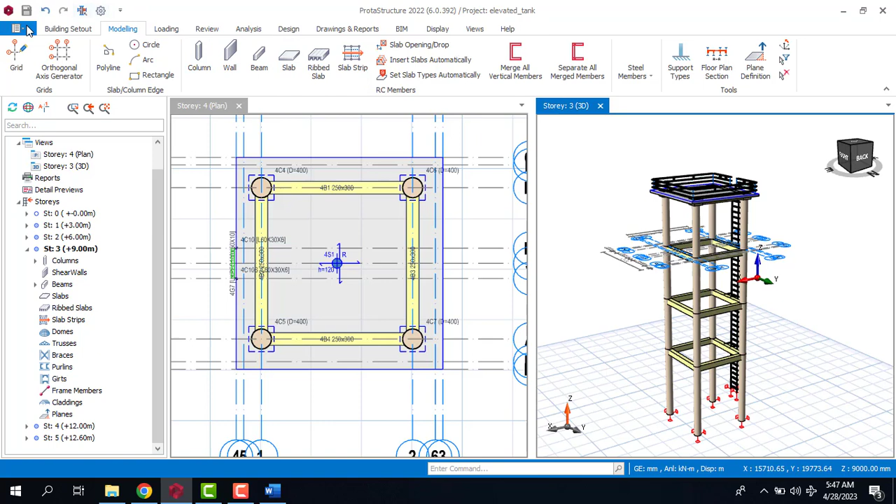Firstly I'll come to new project and I'm going to call this tank.

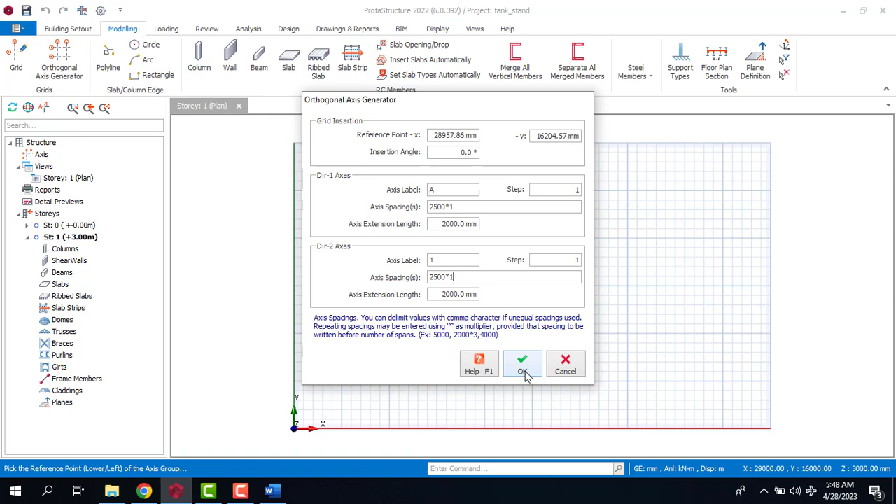Then I'll come to my orthogonal axis generator and I'll make this one, make this 2.5, make this 2.5 as well, and to be times 1. Alright.

So I'll pick on my column. Let's say I pick a 300, let me go 350, sorry, circular column.

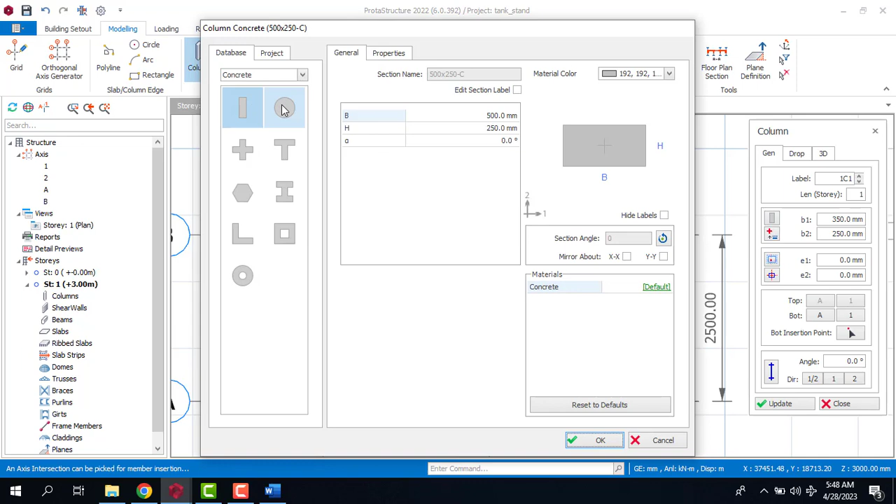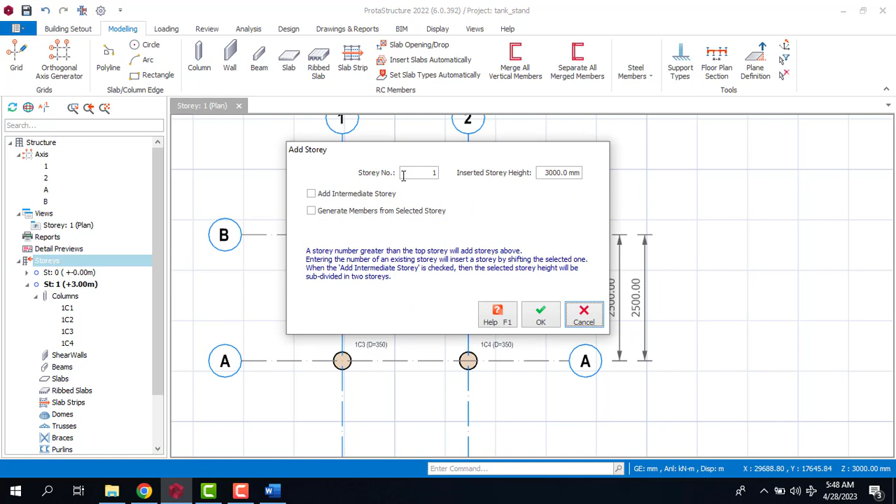Okay, nice. But then I'm going to insert, let's say I insert 5 stories, and I'll come to my story here and I'll click on edit story. This one I'm going to make it 800.

Okay, so I'll click on 3D plan model. Then I will click on story 1.

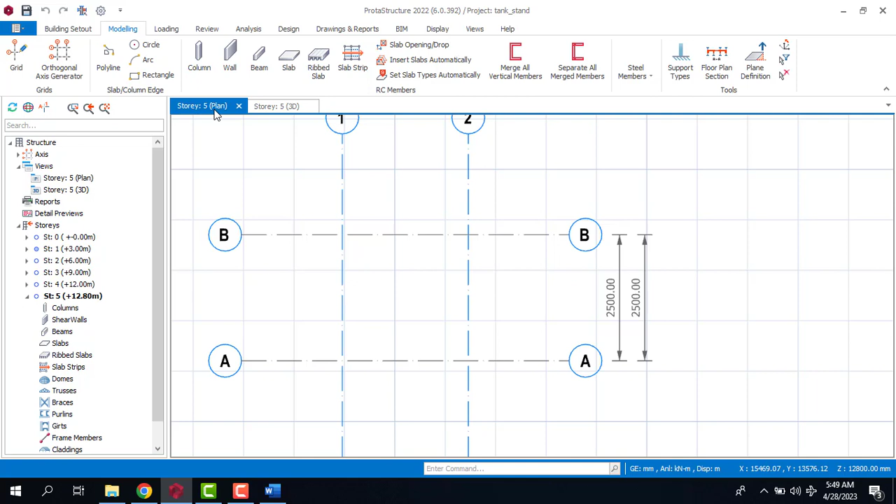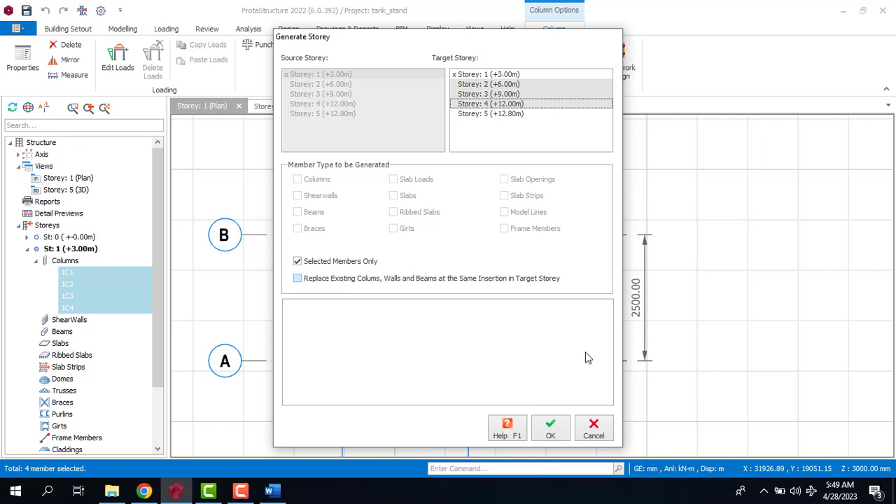Okay, then I'm going to generate these whole columns to story 4. Okay, that has been generated.

I'll come to my view here and I'll click on tile vertical. Okay, so you can see what we have here. Alright, so...

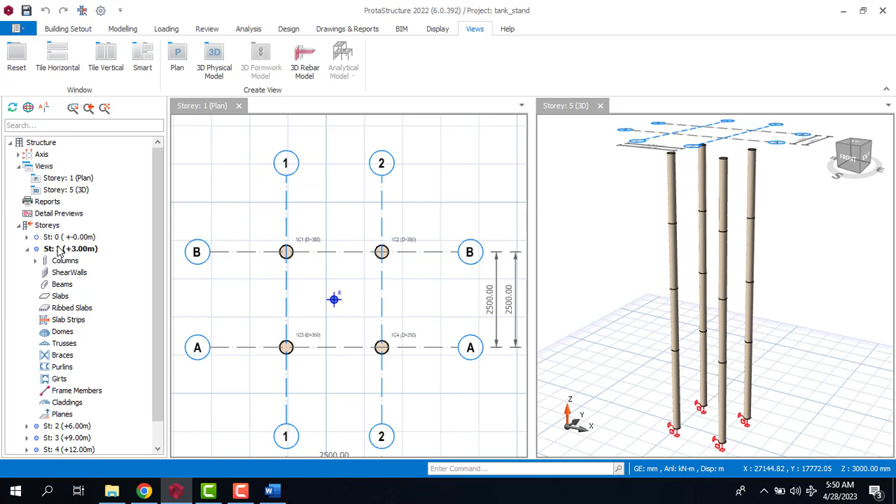Let's insert our beams. Let me pick a 300, 400 size of beam.

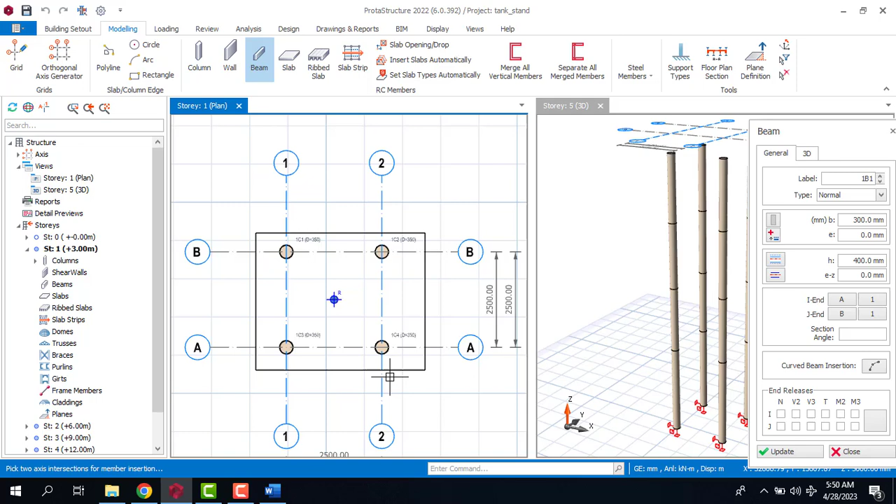Let me generate these beams to other stories.

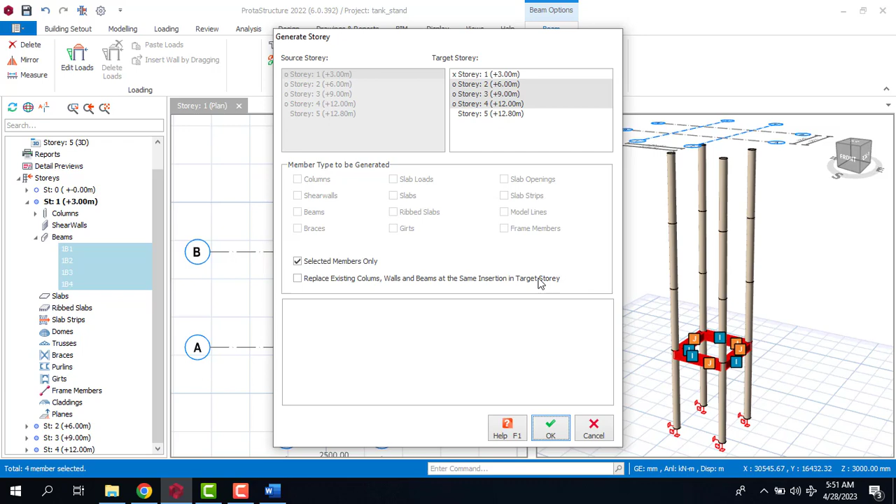Nice. And then on my story 4, I'm on story 4 right now. Come to the property, I will insert a drop for these columns.

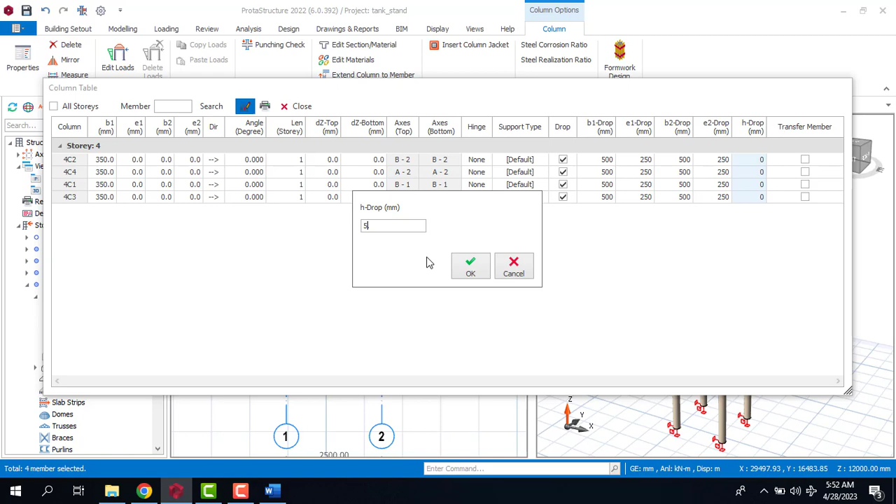Make it 500. To centralize it, 250. Make here also 500. To centralize, I'll make it 250. The height of this drop, I'll also make it 500, and I'll close.

Now you can see what we have. Alright, so at this level now we are going to have this slab to actually cantilever out. So I'll make it like 600. So I'll offset 600.

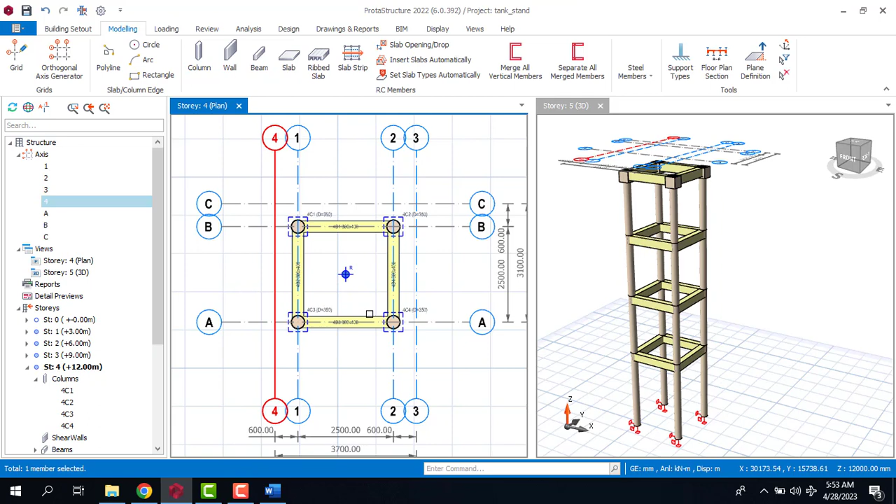I'll also offset this. Press F2, 600. Similarly for this, here will be minus 600 because I'm going horizontal left. If I'm going down vertically, alright...

I can just use my polyline to trace around this. Then I can insert a slab. Let's say this slab is 200.

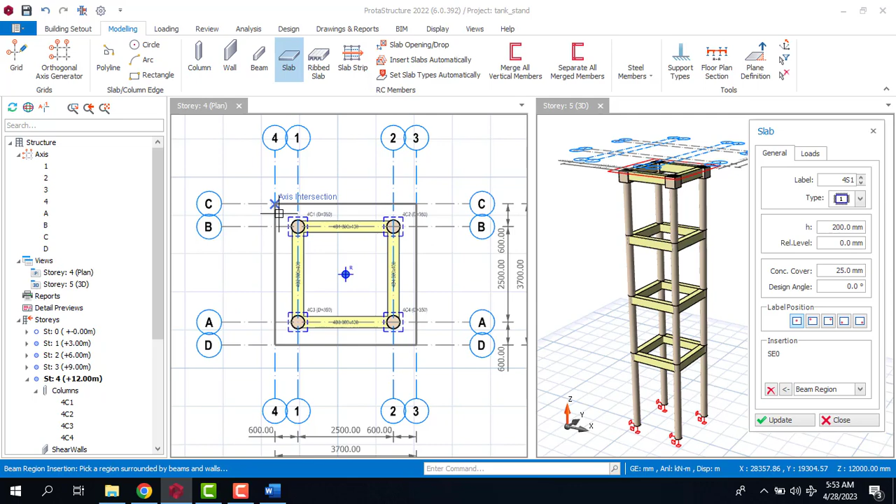Oh yeah, nice. So you can see what we have. Don't forget, I've not loaded this. We are definitely going to do that later as we proceed.

Alright, so we now have our model. I'll come to my columns. Alright, let me centralize this.

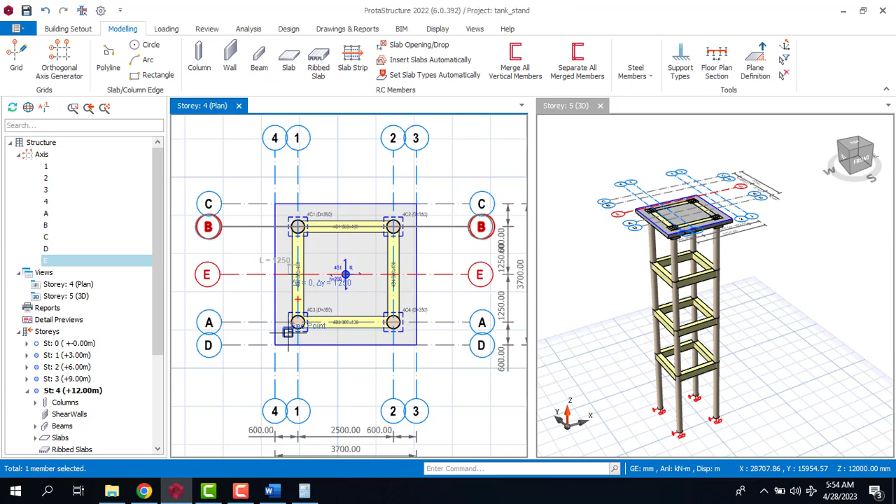2,500 divided by 2, that would be 1,250. So F2 1250. Then here now I'll set F2, make this 400.

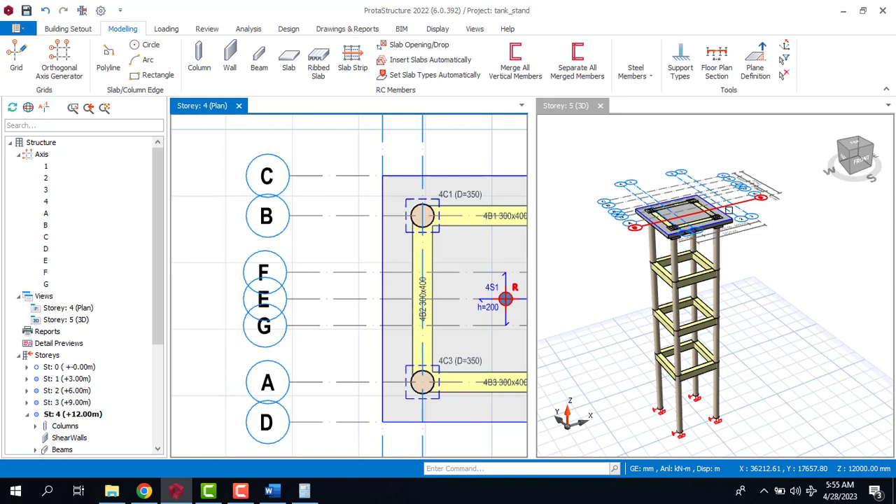I actually want to insert the ladder. Okay, so I want to have a ladder at the center here, and this will be more like the opening. We are going to have an opening here where you can actually just easily move to the top of this particular tank for probably cleaning or any maintenance.

Okay, so let's come back to the story 5. Alright, here now I'll have to insert my rails. Okay...

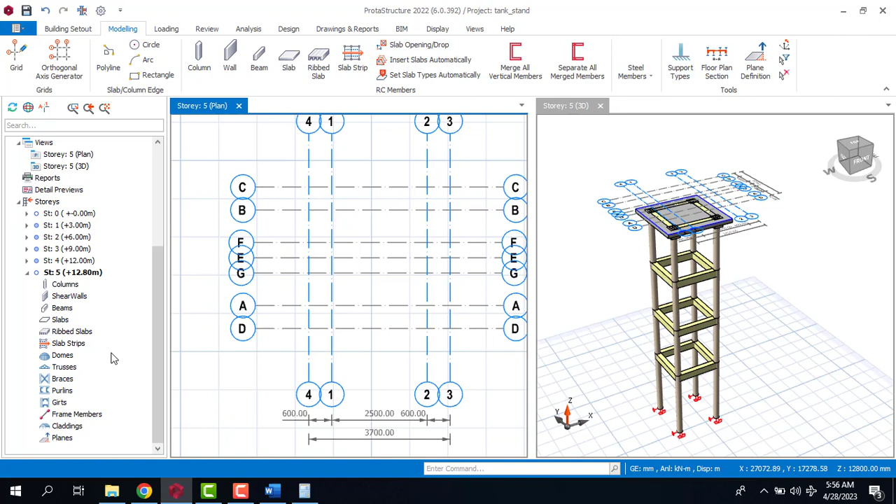Let's come to this point first. Let me insert the ladder first. I'll pick this cross section.

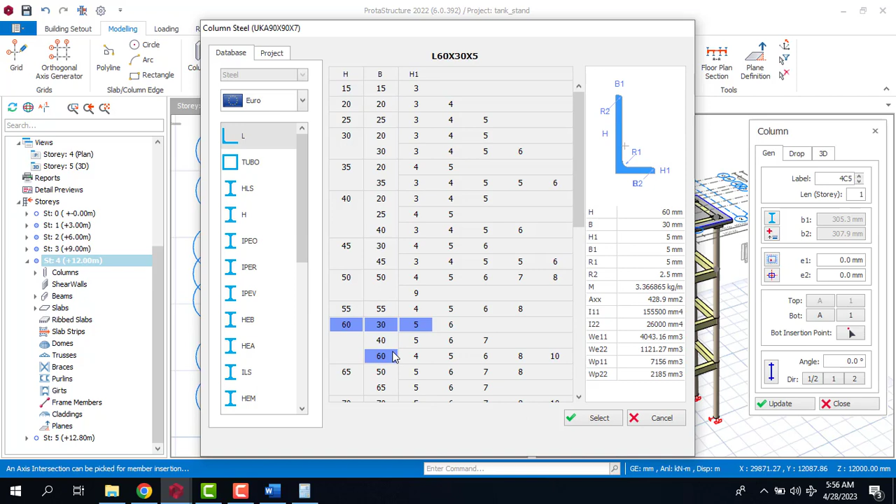You can see for British, you can see this is the lowest you can have. Then if you go to your Euro, you will find other smaller cross section. So, and pick, you can run your design.

If it fails, you know that probably need to change the cross section. So if I have this way...

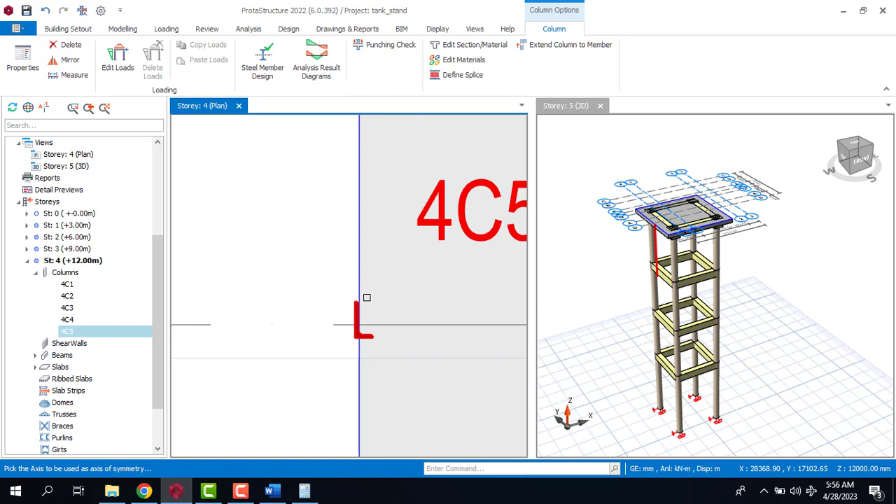I can as well mirror it, use a mirror, and I will select this and I'll click on OK. So you can see it has mirrored this for me.

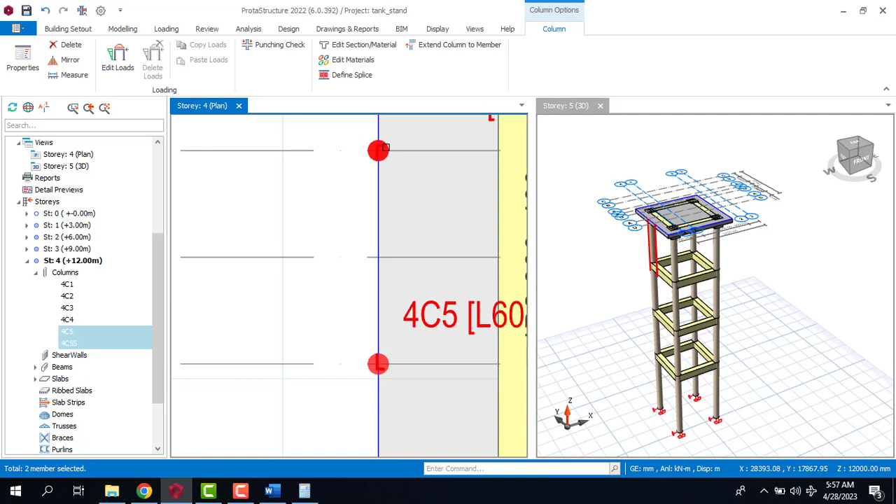Then this, since I have 2, 3, 4, 1, 2, 3, 4, I'll go to the properties and I'll Len to 4 and I'll click on OK.

Now you can see it has gone down to the ground floor level.

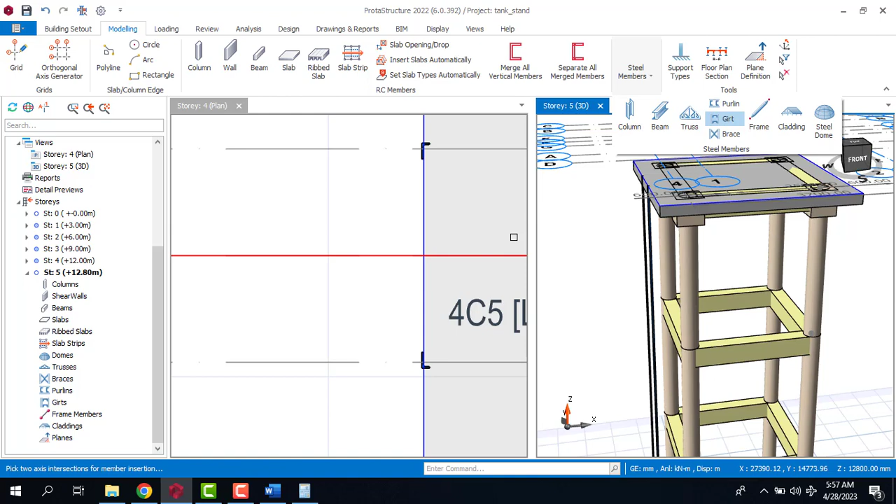Okay, so next thing I will do is to insert the steps, which I will use my girts. So come to this sag rod and I'll make it none, and I'll come to the geometry spacing here.

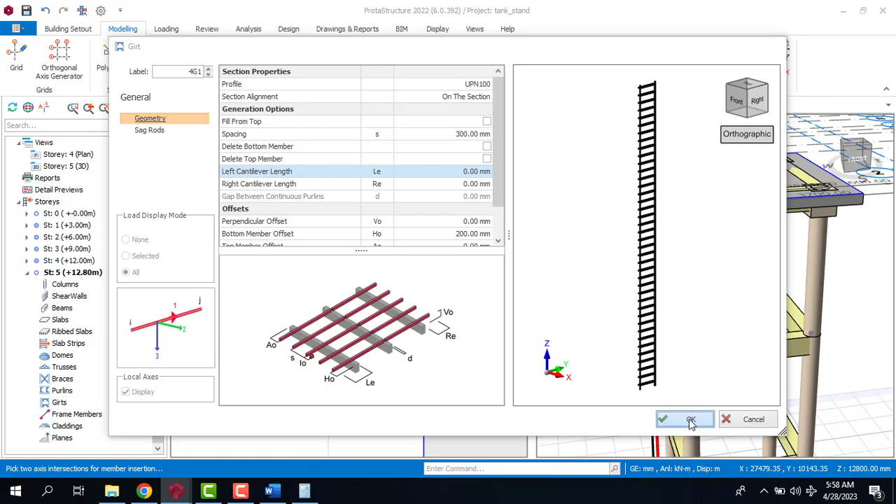Let's say 300, because 1000 is going to be much - there's no way you can put your foot on 1000 spacing. Okay, so 300 is okay. So let's see what we have. Nice.

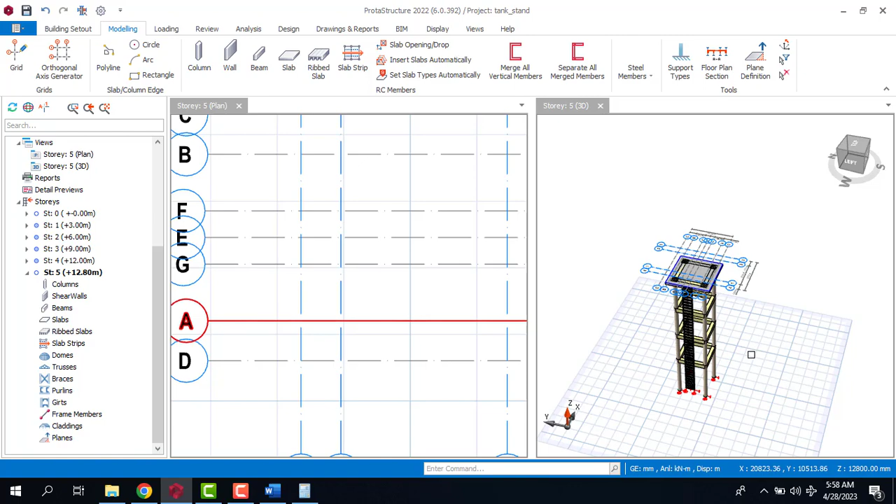Let's go to 5. But all these cross sections - after running your design for your steel, you'll be able to know if it is actually too high. Maybe you will need to change the steel cross section. That's after you have done your analysis and your design, even when it passes. But if the cross section is high, you'll be able to know. I've talked about it before.

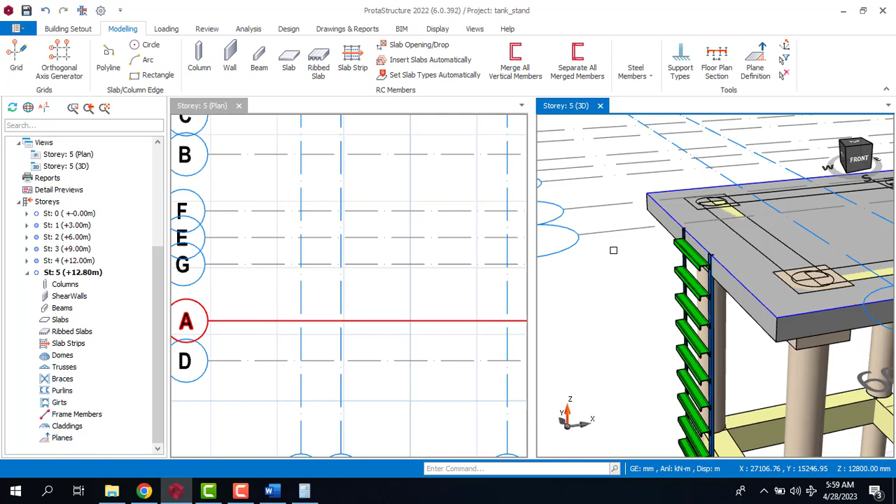We are definitely going to treat it in the next episode of this particular video. But let me show you how to insert these rails here. We are going to be inserting the rail because of wind.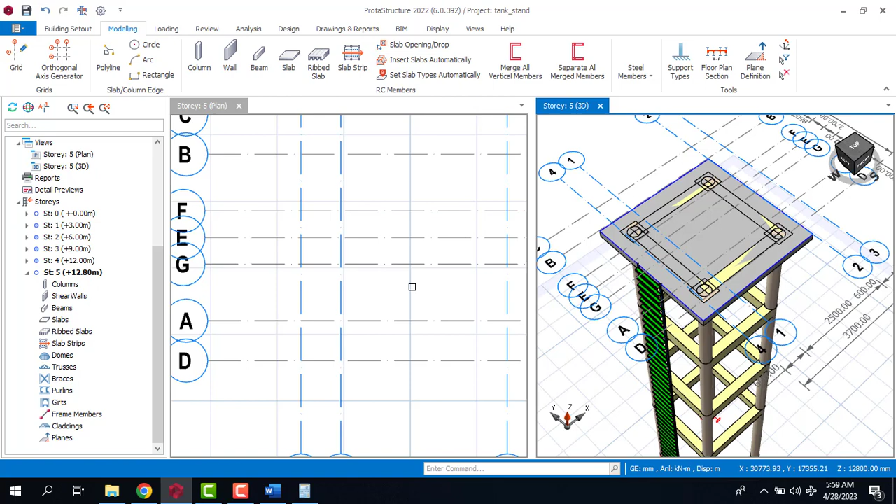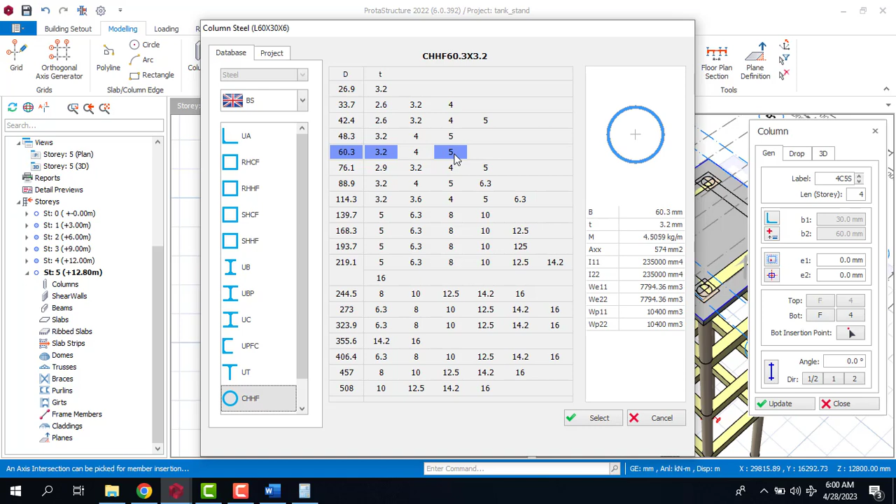Alright, to do that, I'll come to - okay, I'm in storey 5 now. I'll come to steel column and I'll pick - let's go back to BS. Let me pick something. Okay. And column.

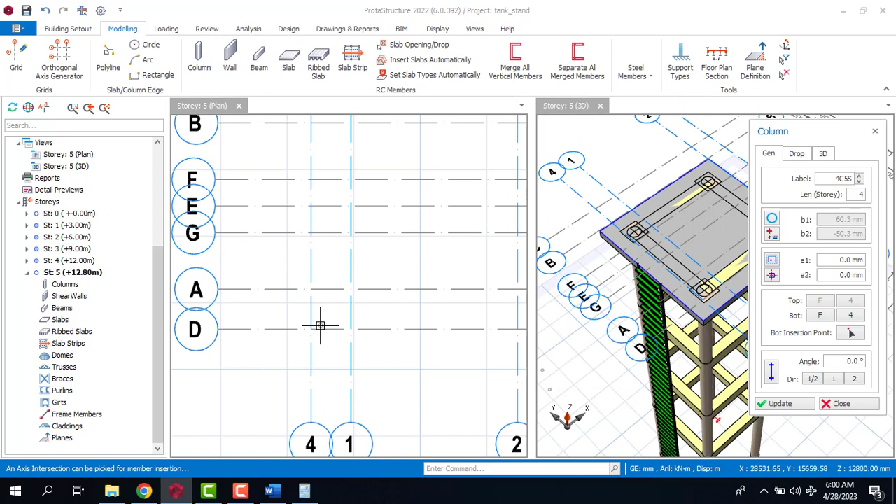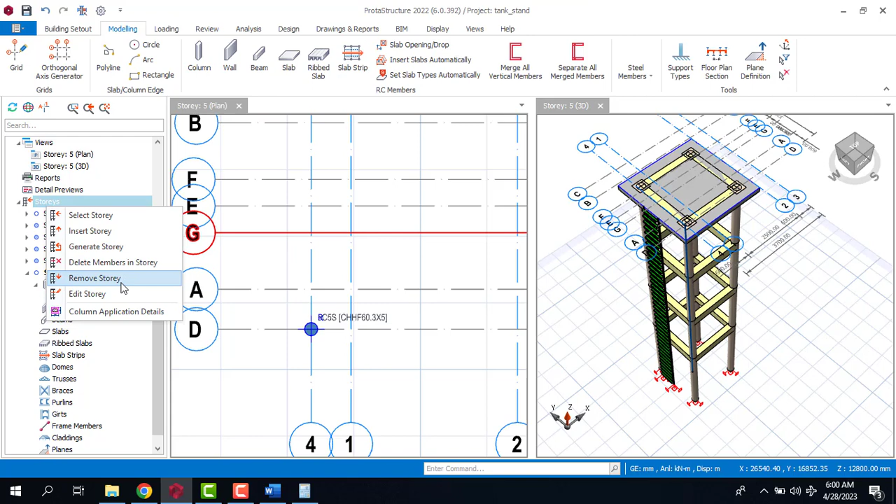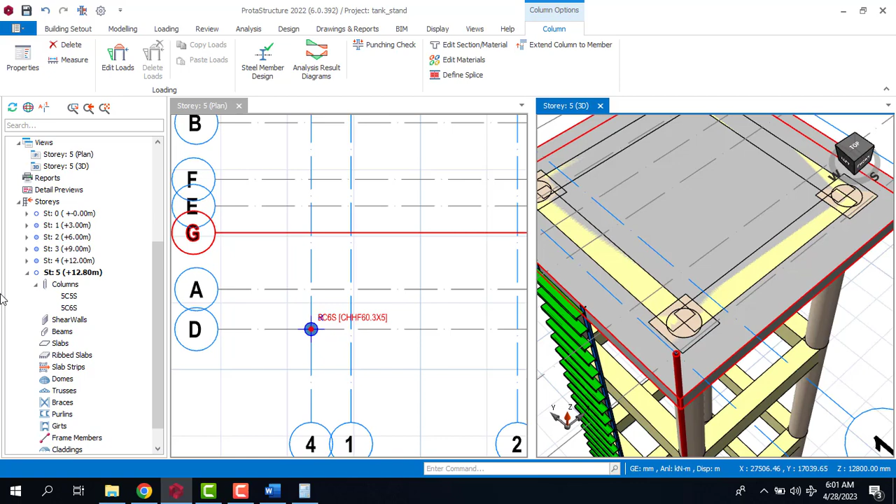Oh, you can see it's actually going down. Setting here. So I'm supposed to - oh, storey 5. Sorry, let me come back to. Something is wrong. DZ. Should go this here, edit storey. This is 800.

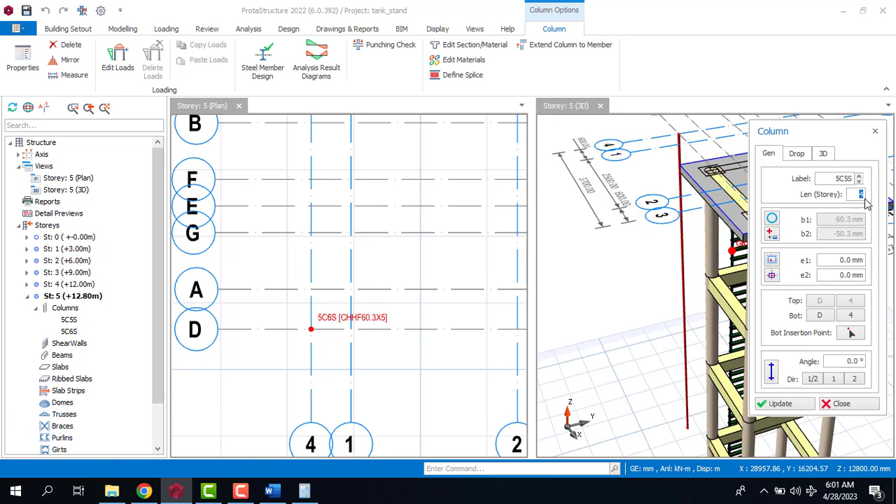Here. It's supposed to be 1, please. Okay, this is standing by the edge of this. I can actually use something.

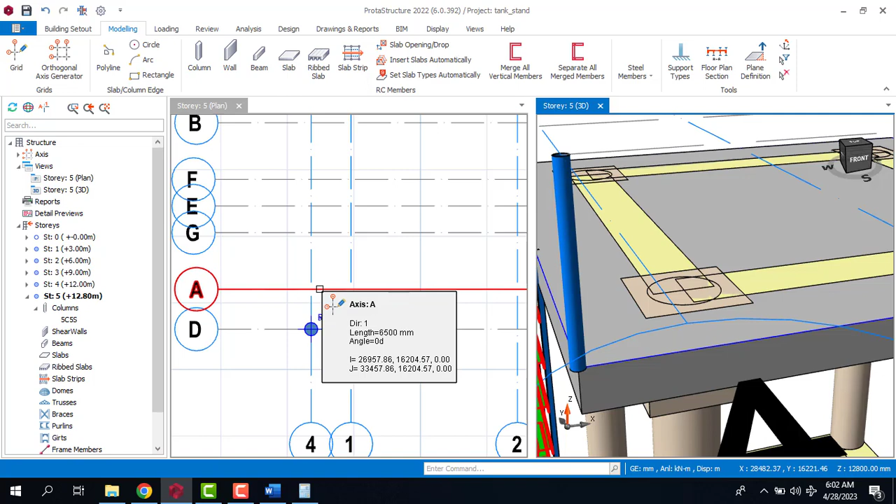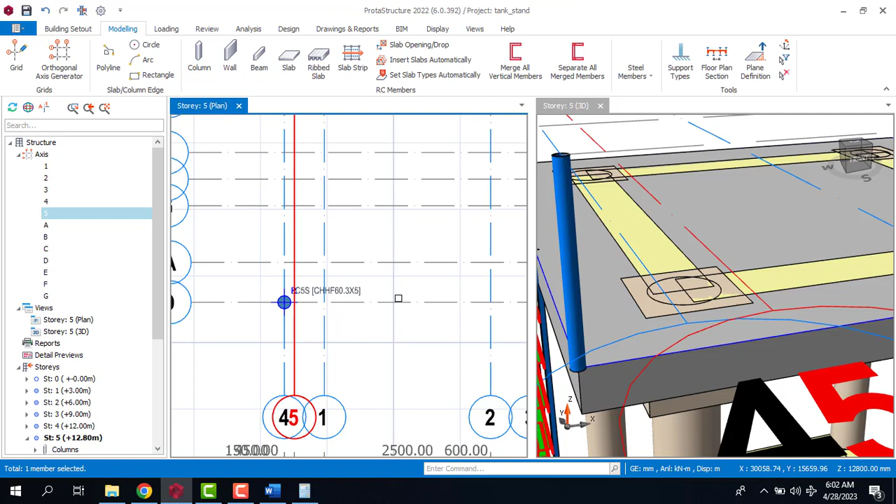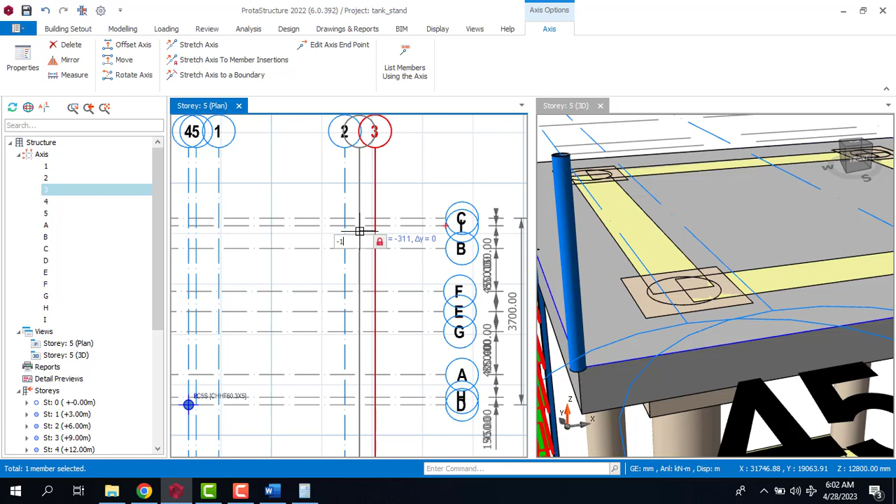Let me offset this by - actually may not need this particular axis here. Okay, but I can't delete it because of other members that are attached to it. So I'll make this 150. I'll set another 150. I'll offset here 150. Okay, this has to be minus 150. And then here I'll also offset minus 150. Okay, great.

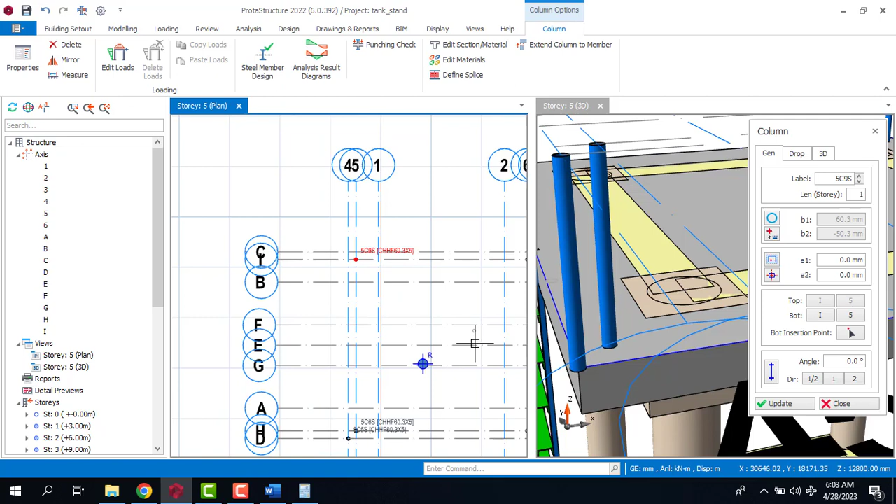So I'll place it here instead. Place this one here. Place this one here. Now place this one here. Okay. Great.

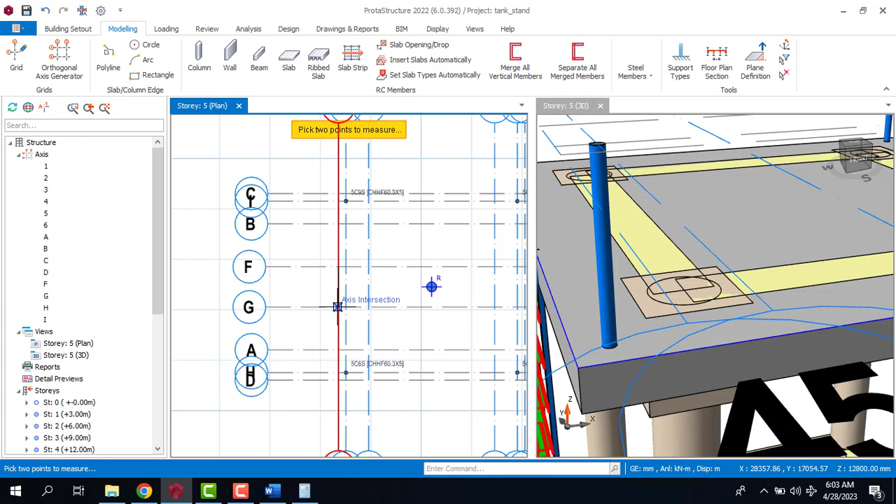But you know, I will not need this. Let me measure this - you know, we said we are inserting. Okay, 800, perfect. This is where I want it. I will double click here. Okay. It's not working. Go to this and this.

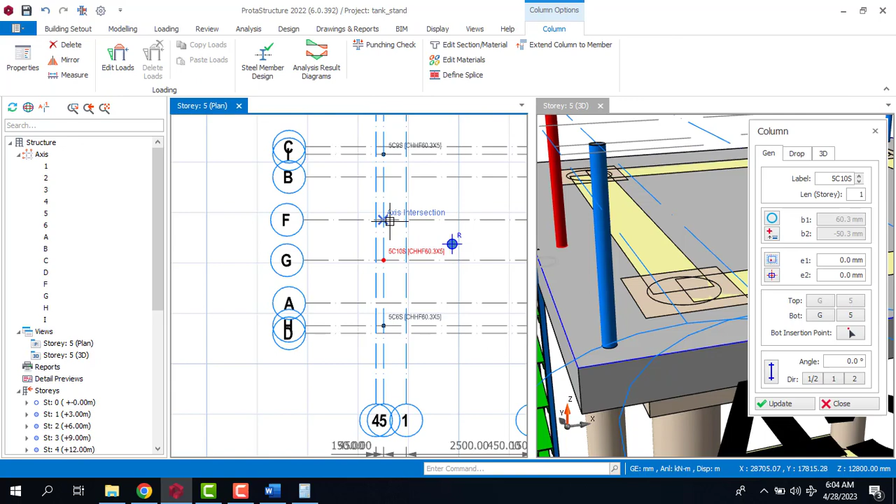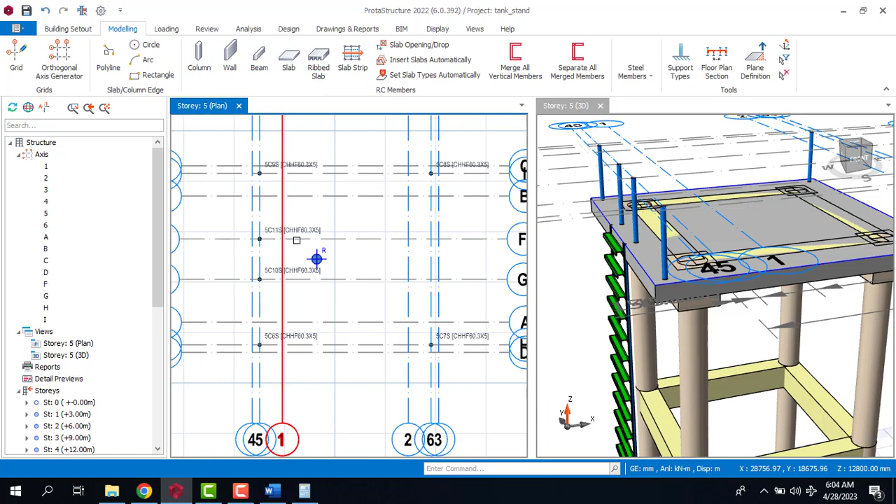So let's see what we have here in the 3D model. Okay, perfect. Alright, so you can add more of this pole. You can have them more, as much as many that you want. But for the sake of this class, let me just narrow it to having what I have like this.

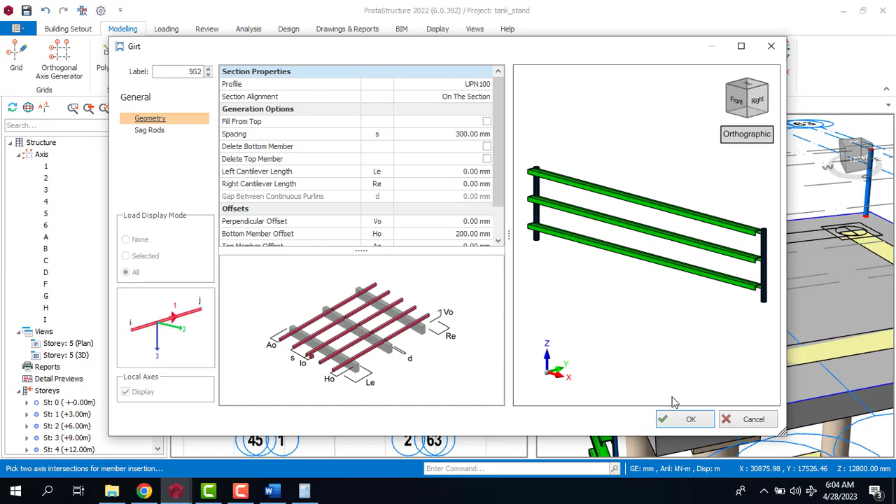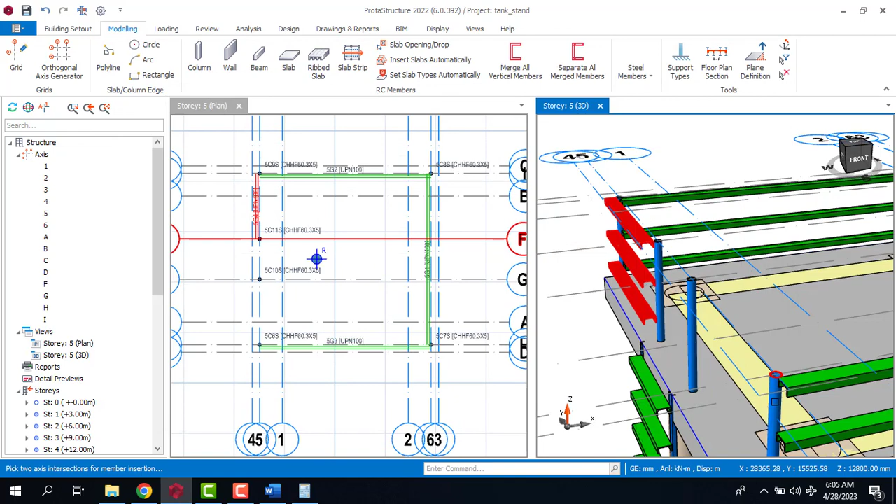So if I come to my girts here, pick here, hold on control and pick the other one. So space 300. Let's see. Okay, hold on control, hold on control, and then hold on control, hold on control. Alright, so this is exactly what I'm going to have.

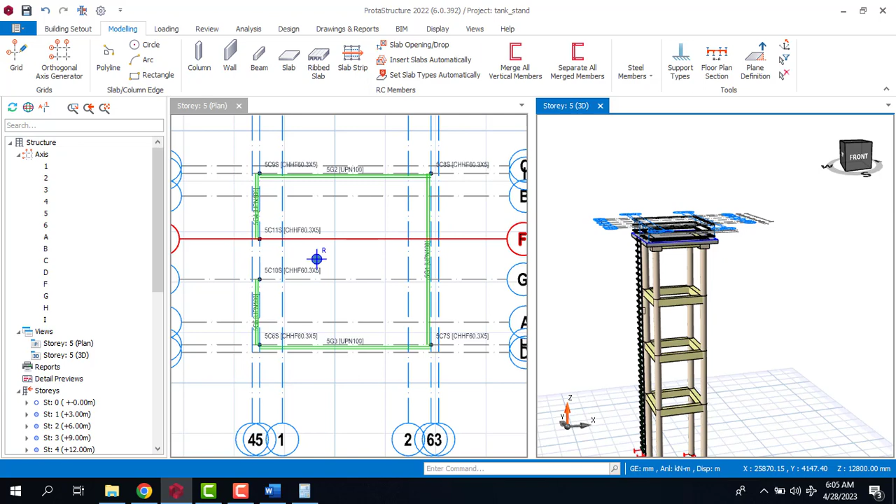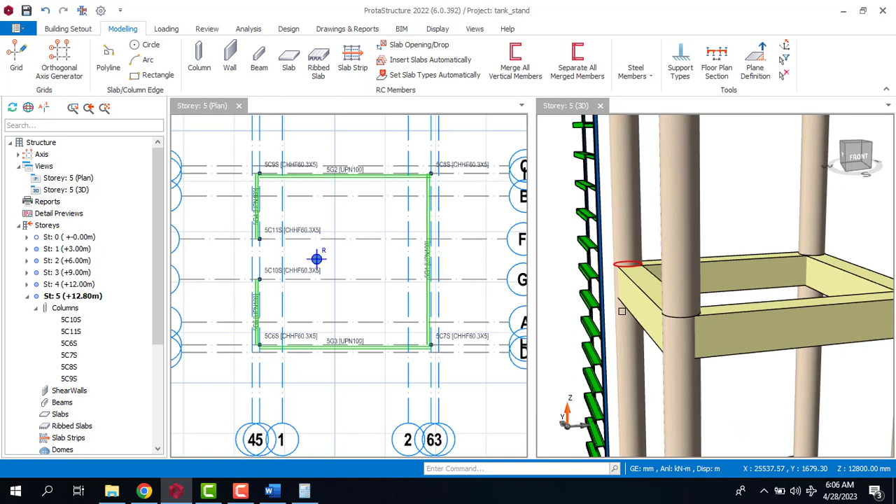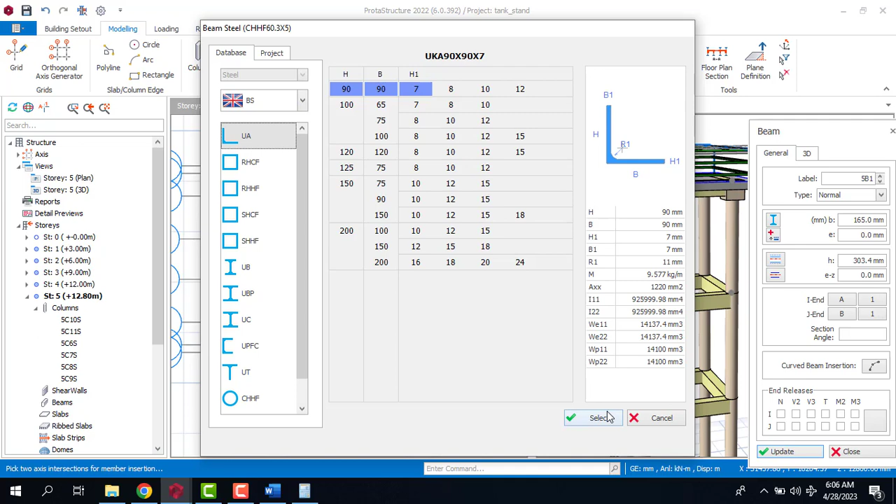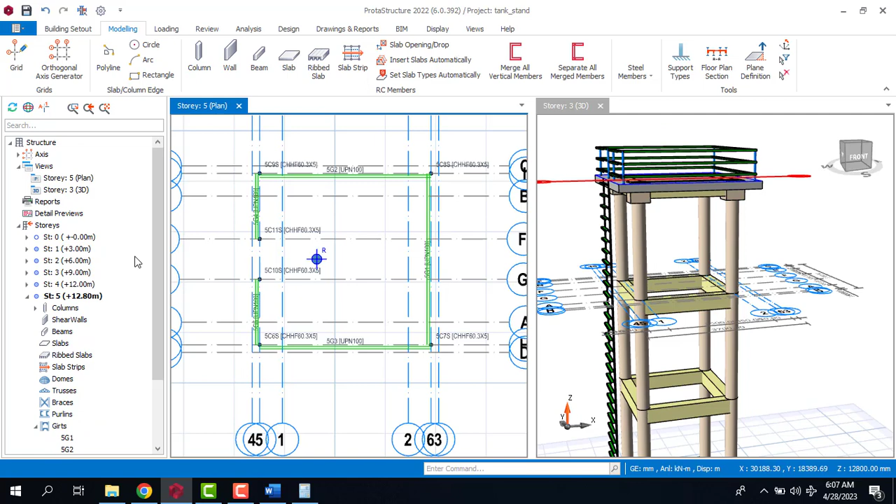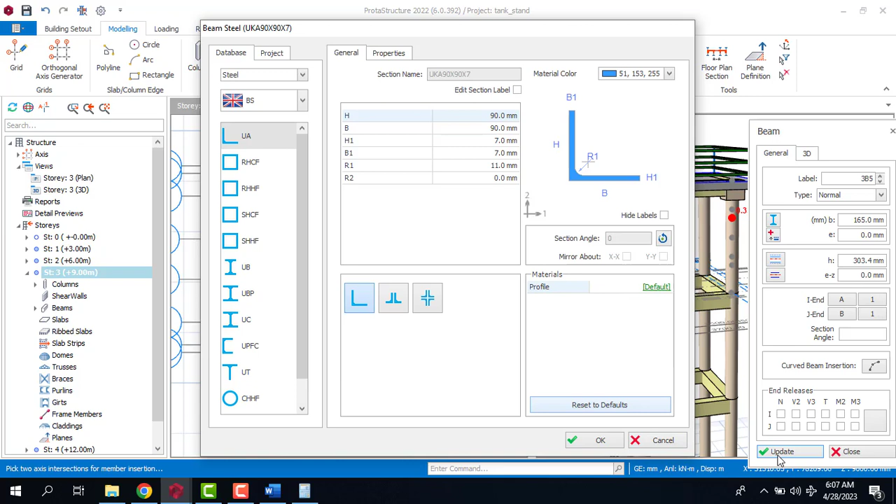So to do that, come to my steel beam and I'm going to pick. Okay, let me just go with this cross section. 3, 4. Thought I'm in story. Beam. Okay.

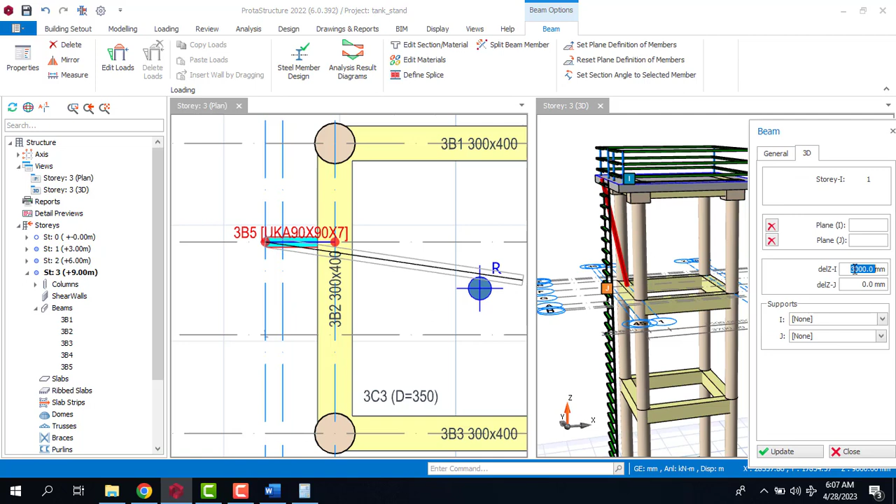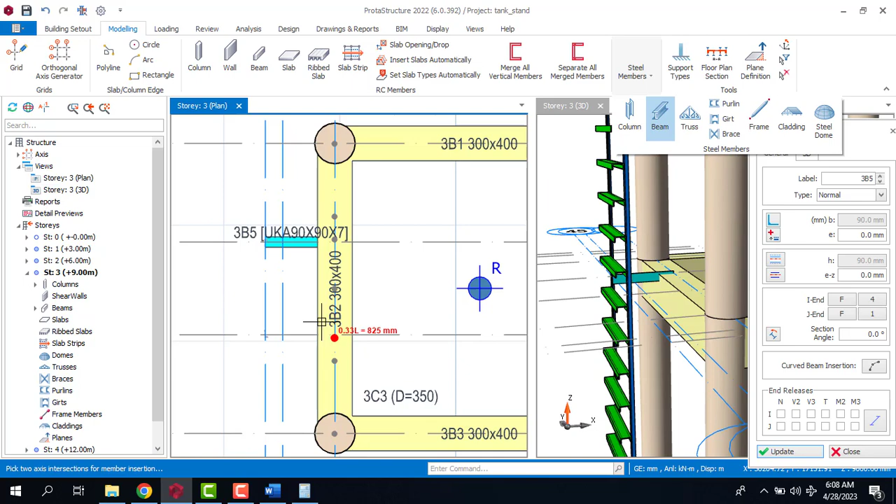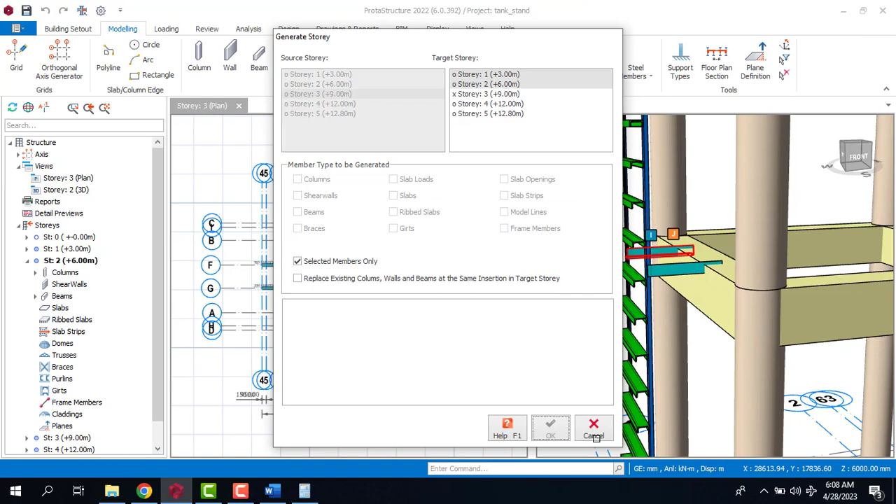Okay, just now generate member to story 1 and story 2. Click on yes, click on okay. Alright, okay, good.